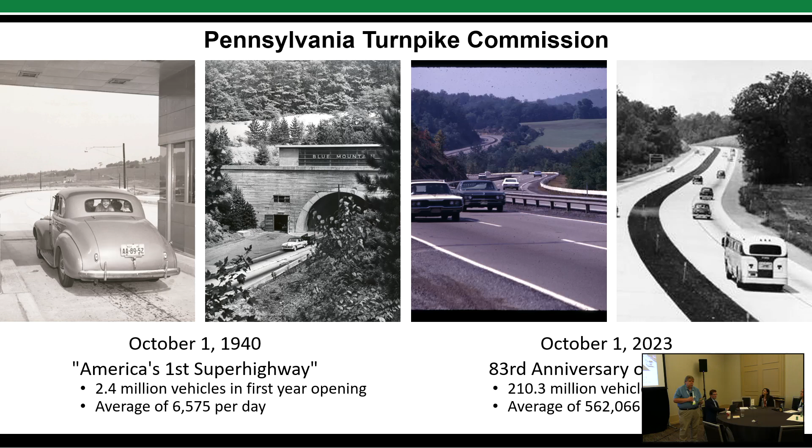Okay, the Turnpike, actually we just turned 83 years old this past October 1st, and basically, initially in 1940 when we opened up, that first year we had 2.4 million vehicles. Just last year, 210 million vehicles traversed our system. Traffic's composed of basically 86% passenger vehicles, 14% commercial.

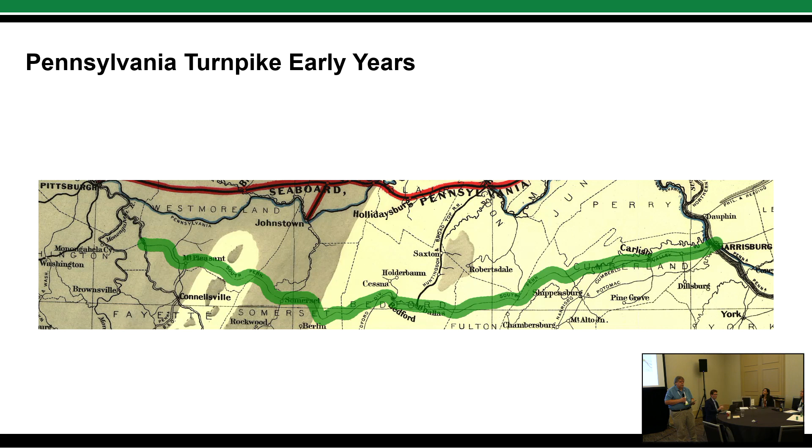Okay, the original 1940 section of the Turnpike really extended only 160 miles from Irwin, PA to Carlisle, PA. Today, the Turnpike consists of 563 miles divided into 7 routes, a main east-west route across from Ohio to Jersey, and then extensions in the west and in the northeast extreme. We have 877 bridges, of which only 16 are deficient, and they are all in design and construction.

There are 28 maintenance sheds, which is about 1 to 5 sheds for each of our 5 tunnels. Speaking of the tunnels, we originally had 8, but in the late 1960s 3 of those were bypassed and then basically sold off.

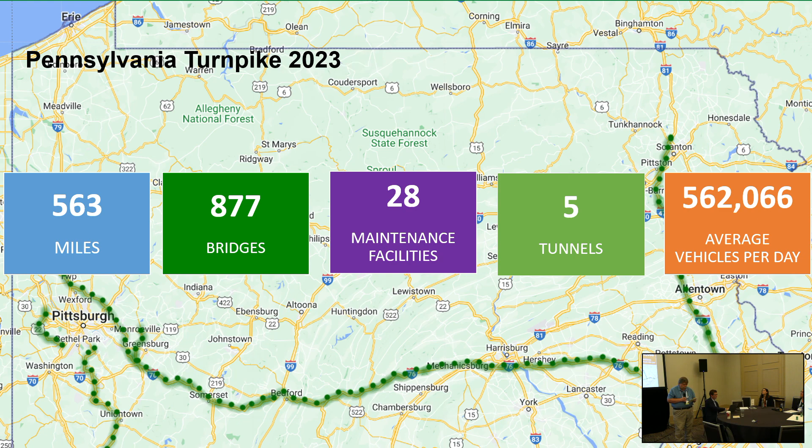The types of projects we're engaged in include total reconstruction of the original section of the Turnpike as constructed in the 1940s and 1950s, from the ground up, much of it widened from 4 lanes to 6 lanes. 150 miles have been reconstructed so far, with another 60 to be completed in the next decade, at a cost of approximately $3.5 billion.

Expansion projects include our extensions in western PA to provide interstate travel through south of Pittsburgh and then connecting with the Beltway around Pittsburgh.

We have open road tolling since we no longer have toll collectors. We are decommissioning our toll plazas and going to mainline gantries, and tolls are being collected via E-ZPass and Toll By Plate.

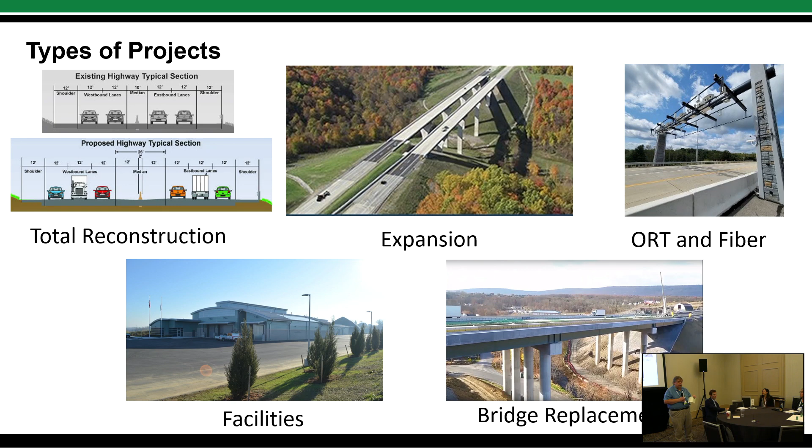We have a fiber optic project where we're installing fiber along our entire system. We've completed from Harrisburg, the center of the state, to the Delaware River by Philly, and we're going on the northeast extension to Scranton. The second phase will be from Harrisburg out to the west toward Ohio on the western extension. The goal is to facilitate transfer of data from our toll collecting gantries, and also data back and forth from our maintenance sheds and service plazas. Plus, we're commercializing part of that to generate revenue for the commission.

We have facilities reconstruction. Many of our maintenance sheds were built in the 1940s and need to be brought up to modern standards for safety and environmental purposes. We also have bridge replacements, replacing older structures with smaller bridges via accelerated construction, which has worked out very well.

Why digital delivery? The project life cycle, or more accurately the asset life cycle, is what's important to us. We have capital planning based on available dollars, and we assign those dollars based on need. Then we go into project planning, design, construction, collecting as-built data until the project closes out, feeding that information into, at this point, a theoretical digital twin, and then providing that information for operations and maintenance, for asset management, and feeding back into capital planning.

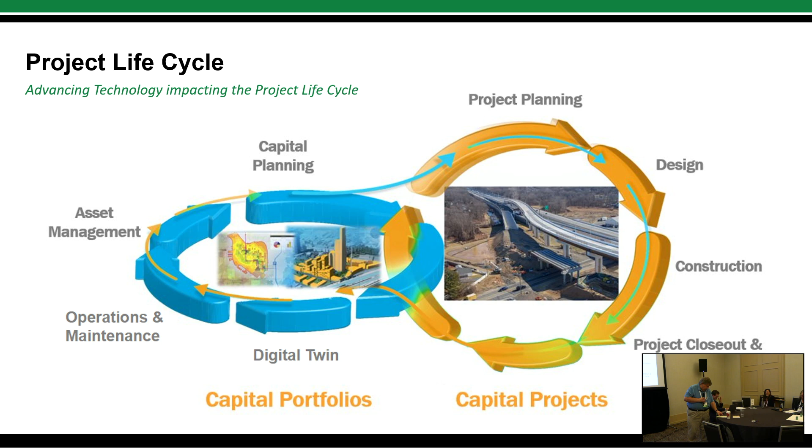From everything I've seen the last few days, this is a more daunting task than originally anticipated, but I'm looking forward to it, at least for the next year or so before I retire, to help lay a lot of this foundation, and then Mark will work for the next 20 years.

Using 3D intelligent models as a primary source document will facilitate reductions in project errors, convey clear design intent, provide greater accuracy, improve collaboration, provide more in-depth asset management, and other benefits we see.

To the PTC, digital delivery means rethinking not just our design and construction processes.

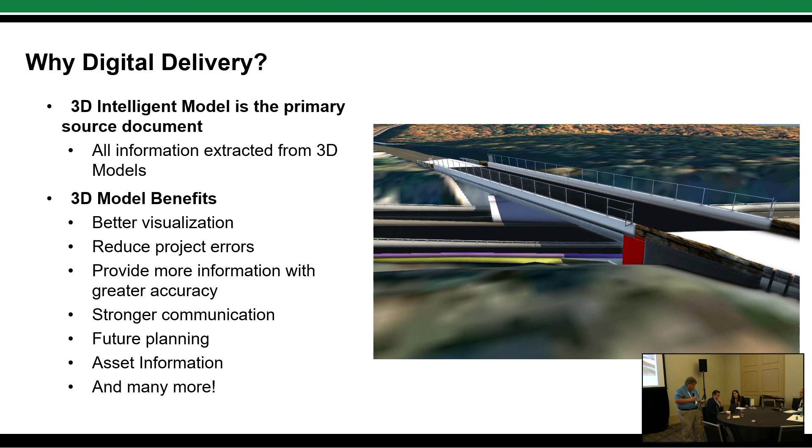To the Commission, digital delivery means rethinking our process from design through construction, but also how we can improve our workflows to streamline our data so that our maintenance and operations groups can consume that data and execute their jobs more efficiently, affecting the whole enterprise.

Our digital delivery program consists initially of our engineering technology plan, a strategic program. We met with 13 out of 14 partners at the time, and approximately 80 people over about 20 meetings, to get feedback from them, find out what their pain points were, and let them know what we were looking to accomplish and what they needed from us to help facilitate their job. That ended up producing what we call an engineering technology plan.

But it's not a static document. We're actually getting ready to revise it again, especially based on what a lot of people learned here this week, and take it back to our leadership to explain what we learned here, then revise it and make adjustments in how we move forward.

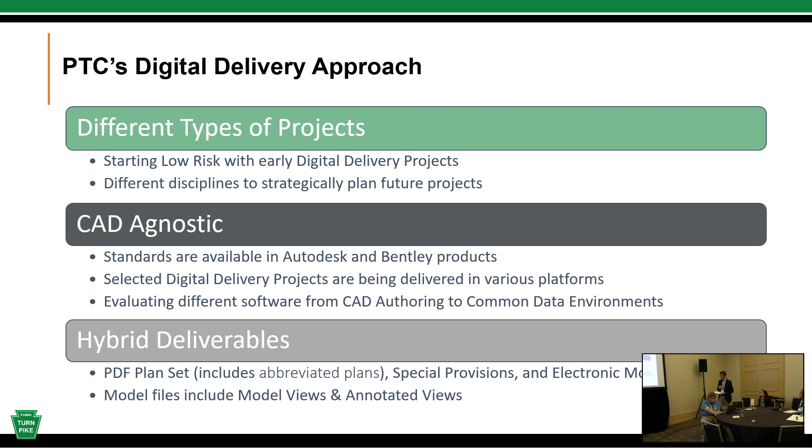CAD agnostic, some of the benefits: it gives designers a chance to play with their strengths, and that's one reason we wanted to go that way. We definitely want designers to use the products they're familiar with and let them use whatever they want. It prioritizes data over software, which is another reason to be agnostic, and it doesn't limit by one platform, so it's nice to have options.

Challenges: I did mention before, managing the multiple standards can be a bit of a challenge, and it takes a little more effort in order to do that.

Various tools, common data environments, things like that - we know that Bentley products don't necessarily work well with Autodesk products if you're going to ACC and vice versa. It's not always easy to do that. I think we're hoping in the future that IFC will solve some of those issues. Software advancements are not uniform, so one product may be a little bit better than the other in some categories, and in other ones, the other one may come up and be ahead.

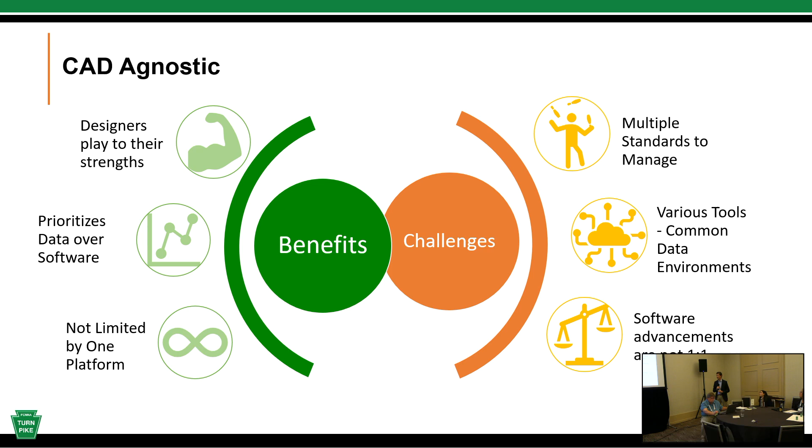News releases - for our digital delivery projects, we have started news releases for those. So 2 to 3 months before the project will be advertised, we actually put a news release out saying this is the type of project it's going to be, it will have this type of deliverable, which is the hybrid. We'll kind of go through the sheets that would be included in the hybrid portion of it, and then we'll let them know what type of software would be delivered in.

That's something we'll be doing for the first couple. The advertisements then include all the contract documents, so you'll have plans, specifications, and addendums go up there if there are addendums, and then RFIs. So contractors can send RFIs in and we can answer them through this system. And then obviously construction bids, they come from the same system.

How are the electronic files included in the bid package? When we started this process with our first project, it took a lot of coordination with our legal department. So we've added some special provisions and modified a few special provisions with specific specs. It outlines the type of software version, model files that were created for the project. And then we've done some others that allow us to seal electronic plans as if they were hard copy plans, so electronic files are basically the same as plans in the set.

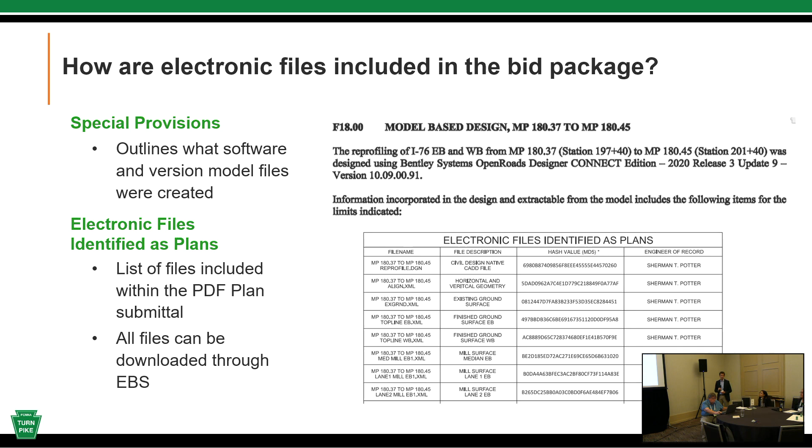So I mentioned the date and timestamp. We advertised that first project, and the team quickly realized that a date and timestamp is not a good idea when you're dealing with electronic files. The way it works, our designer sends the files to us one form or another - they upload to our SharePoint or whatever they do. And then our construction management department uploads them to the EBS. So each time those change file directories, that date and timestamp changes.

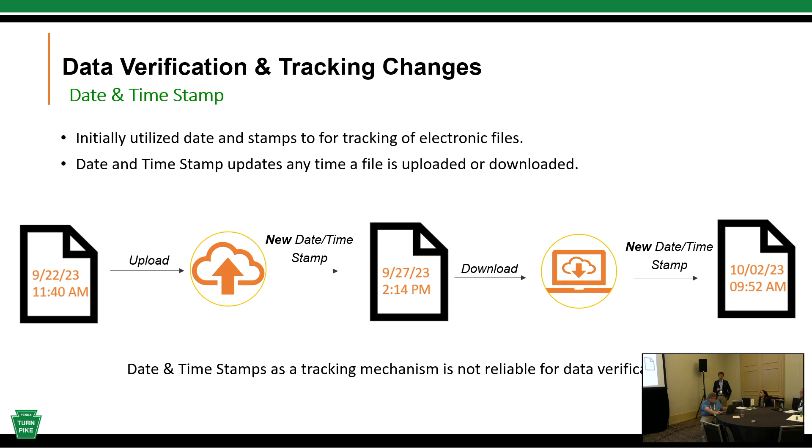Realizing that was an issue very early, we decided to go to a different method, explained here on this next sheet. So we started using hashes for the next project that's going on - the project we started on is advertised. It's basically a signature that identifies some amount of data, usually a file or message. And this is not new technology at all - these algorithms were first developed in 1958, so it's definitely technology that's been around for a long time.

This hash value that you can see in these electronic files is a 32-character alphanumeric value that basically changes anytime something changes in that file. So if someone goes in and changes a line by a thousandth of a foot, that hash will change in that file if it's saved. So it basically gives the contractor, in our opinion, confidence that what the designer delivered is also what they're looking at.

I actually looked up some stats on this, and I think it's like 1.47 times 10 to the negative 29th chance that this hash can be repeated in a file. So it's like getting struck by lightning several times, I'm sure.

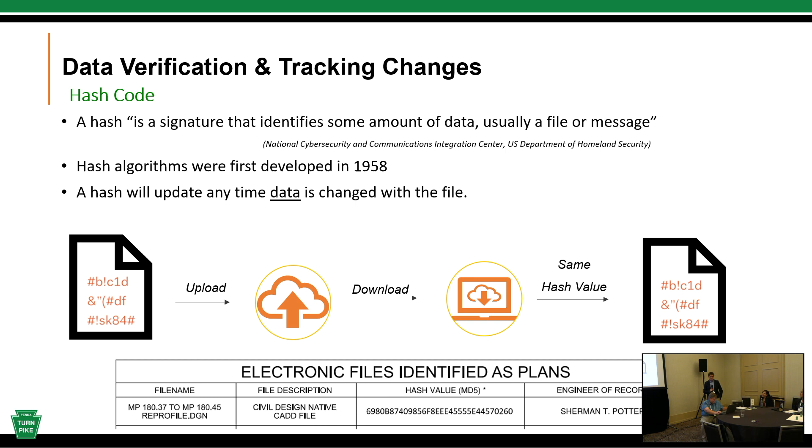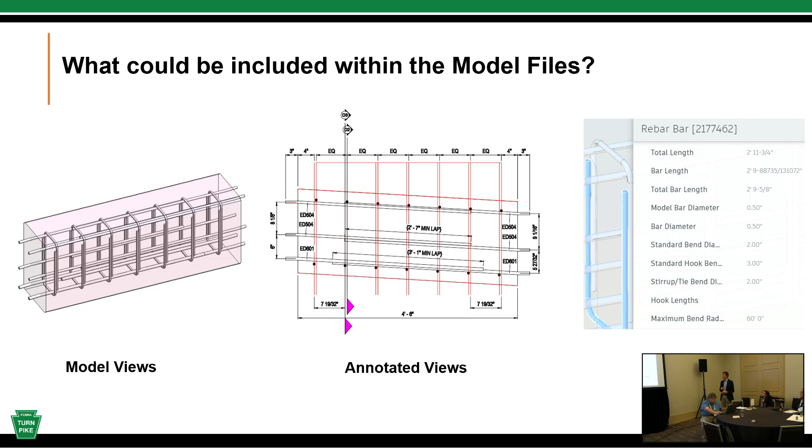So what could we be including in these model files? What you're seeing here is part of the project we advertised a few weeks ago, maybe a month ago. It's a diaphragm from a bridge. On the left is a transparent view showing rebar, and in the center is what we're using as annotated views. Next is the property data. These model files contain all of this data: the model files, annotated views the designer felt were important, and you can click on an item and see the property data as well.

This is the video I mentioned. This is actually a pier for the project, so this is the pier model. You can see if you click on the rebar, you get some data on it, basically telling you what it is, the size of it, the length, things like that.

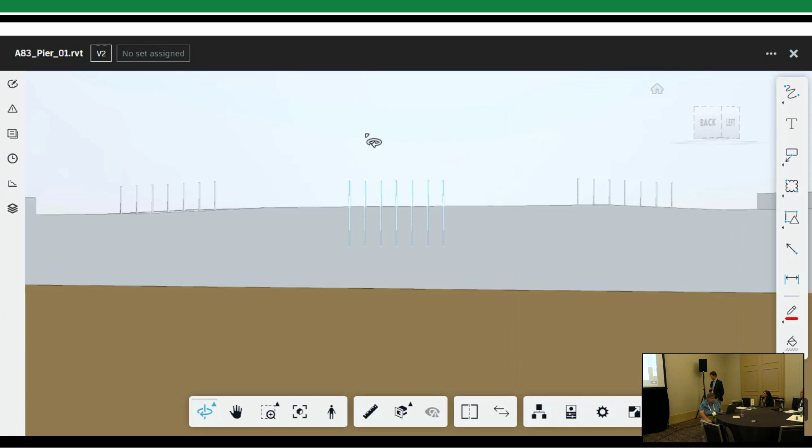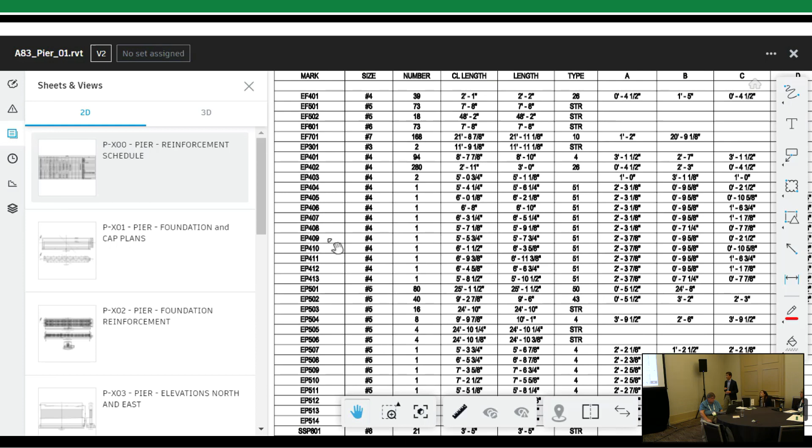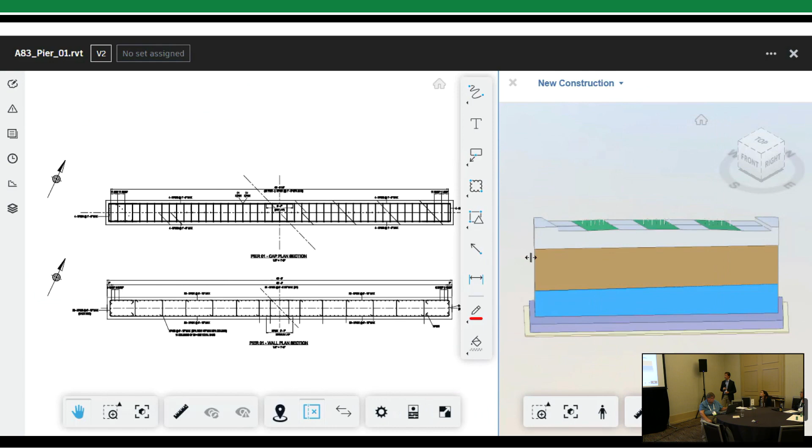Once you open them, you can see the 2D views. Those are the annotated views I mentioned earlier, views that the designer felt were important to the project. I'll point out that all of this information comes directly from the model. This isn't something the designer uses and annotates afterward, it's actually data that's in the model, extracted directly. So we're not depending on a designer to type something in, this is all information we know is at least in the model itself.

A little bit more on the right there, you can see you can turn layers off. It's similar to being in my CAD software, you can't really do anything in it, but you can pretty much see everything that's in the drawing. You have layer control and things like that as well.

Okay, next, additional files. We're looking at multiple options. We really don't know exactly the way the industry is going to go right now, we don't know exactly what contractors need. So the first project we advertised and did had XML files in it, and Stephanie's going to go into more detail with the projects themselves. We did provide one IFC file as a pre-bid with our bridge project. And then on the left there's a federated model, that's something we may or may not include with the package itself.

The last project we advertised was components, basically. So it's all the components, and we provide that list with the hash to each item to confirm that nothing changes. So we're still investigating the file types, bottom line.

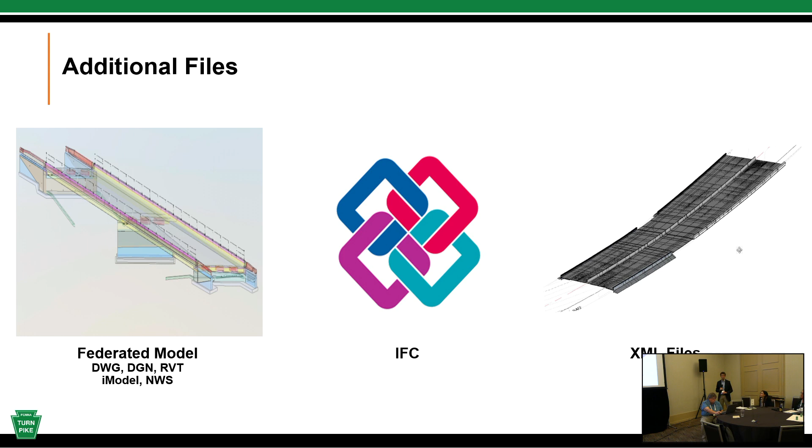Next, I believe I'm turning it over to Stephanie to go through our digital delivery projects in detail.

So our first phase of digital delivery projects, we start with four different types of projects. As Mark was stating earlier, we want to start with low risk, but also look at the different disciplines. As you can tell, the Turnpike Commission does a wide variety of different types of projects. So starting off, we started with a resurfacing project, and right now we're going in order of the advertisement or bid date for each project. That resurfacing project was about a 4-mile span, and it had a very small, about a 400-foot section of reprofiling that was needed.

So that reprofiled section is what was bid as our electronic file, as the legal document, model as the legal document for that project. All of these projects are some type of hybrid deliverable, so there is an abbreviated plan set that typically includes our PDF contract documents, general notes, things like that, as well as a list of those electronic files. Our next project is the A83 Bridge Replacement Project, and this project encountered a lot of firsts.

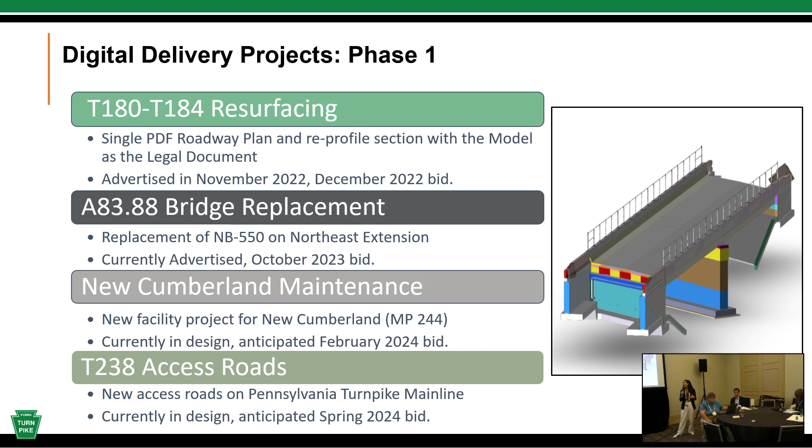We were advertising the full structure as a legal document, and we'll get more into details for that. This project is also a little unique too, it's a Turnpike bridge project carrying a state road, which means the Pennsylvania Turnpike Commission is responsible for design and construction of that bridge project. However, we do need PennDOT approval because the bridge will actually be turned back over to PennDOT once it's constructed. We also have a maintenance facility project as well as an access roads project, which I'll get more into detail on the next coming slides.

So the first project, T180 and 184, there were two things being tested here. The hybrid deliverable actually included a single project PDF, full-length project PDF of the roadway plan, and then we had that reprofile section as the legal document.

With the single project PDF, it also included legends and colors to easily depict the roadway aspects. It will identify where median and shoulder mill and pave was compared to the lanes themselves, as well as an additional couple of items, reprofiling section, rock lining, and so forth.

The feedback we got from the contractor for this specific item was overall enthusiastic. They said this is such a game changer to actually have colors involved and be a little bit more intuitive to see what is happening where very quickly with the project.

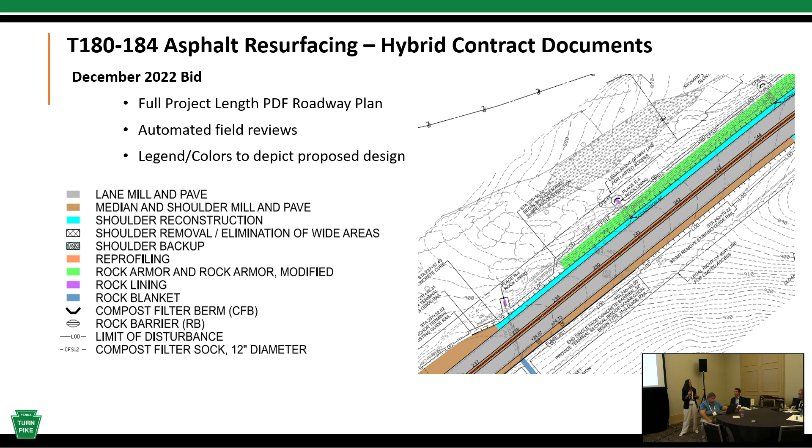And then we get to our electronic files. There were actually 11 electronic files included with this. We started with just one DGN file. This project was completed in Open Roads Designer.

That was for the reprofiling section, which we'll see a little bit more in depth. We also had 10 Land XML files, so this was for the surfaces of the various pavement layers for the right shoulder, different lanes, looking at subbase, and so forth, with the idea and hope that the contractor would be using those XMLs as a part of their AMG or for whatever purpose they may need.

This also includes some as-built special provisions, specifically for the median barrier guide rail, a couple of special grading areas. This is looking more to the future, getting that as-built data back. The survey methods were open. We just want to see what we would receive from the contractor, and that way we can take that data and see where we want to go next with this model overall.

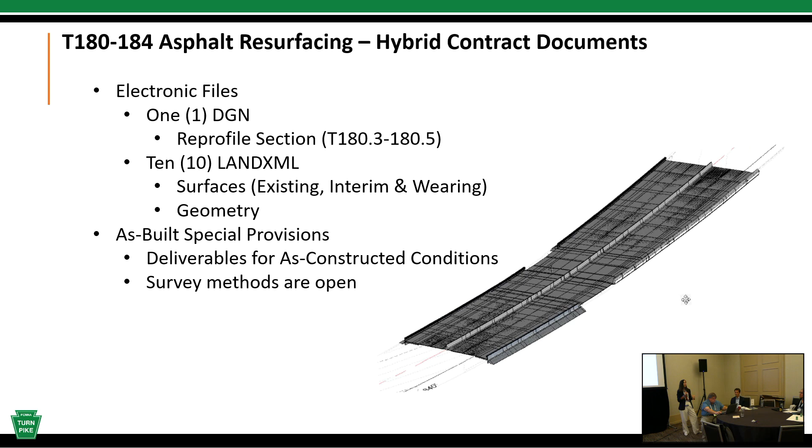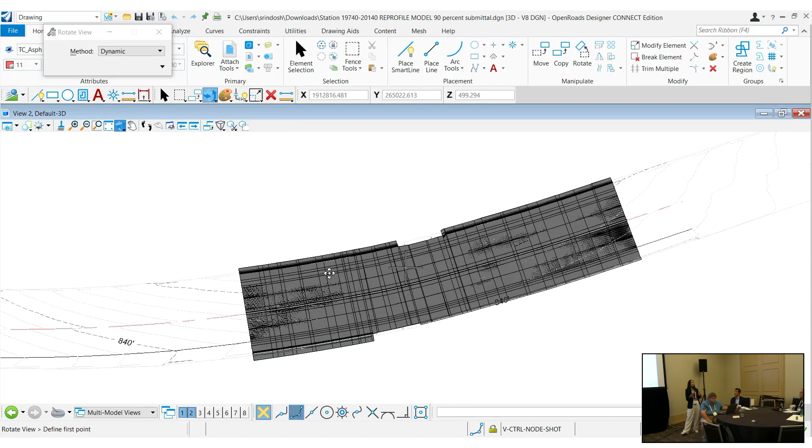So we can go ahead and see this video. This is within the Open Roads Designer of that reprofile section. We just need to hit the space bar to play it. Nothing fancy or to be blown away by - I'll save that for the coming videos. But I just want to show that it was a simple project, low risk, and this is really truly just getting our feet wet with digital delivery.

A lot of the aspects for the front end actually involve talking to legal and construction on how these projects can actually be included as a legal document. So we wanted to safeguard and do a small section of the roadway itself - only 400 feet, a resurfacing project.

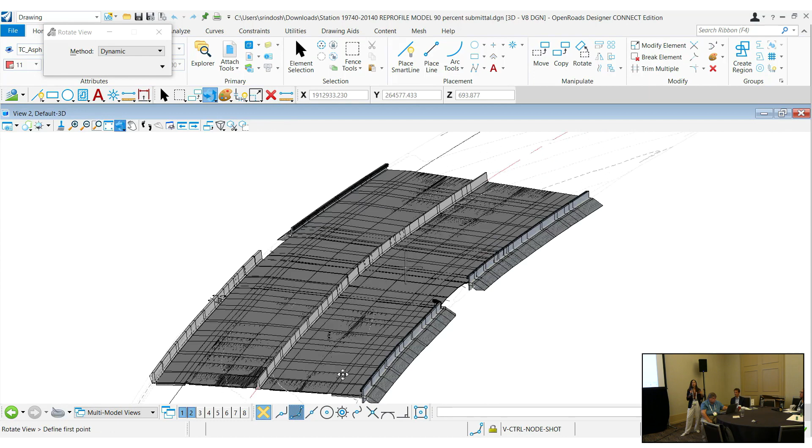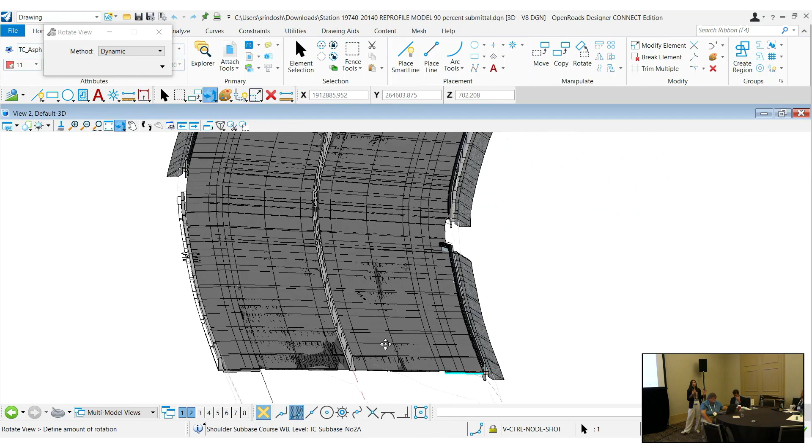You can click on the different pavement layers. It will pull up the property information, which you can see in the common data environments for the cubic feet of volumes, as well as the type of material that was used. So really low-risk project, and construction actually just completed the westbound side of this for resurfacing through that profile. There hasn't been any alarms yet, so that's a good sign, but we still have to do the eastbound side, which is happening over the next 2 months.

And then this next project is our A83, our bridge replacement project along the northeast extension. So this project had a lot of firsts. It was our first project using hash codes as our data verification.

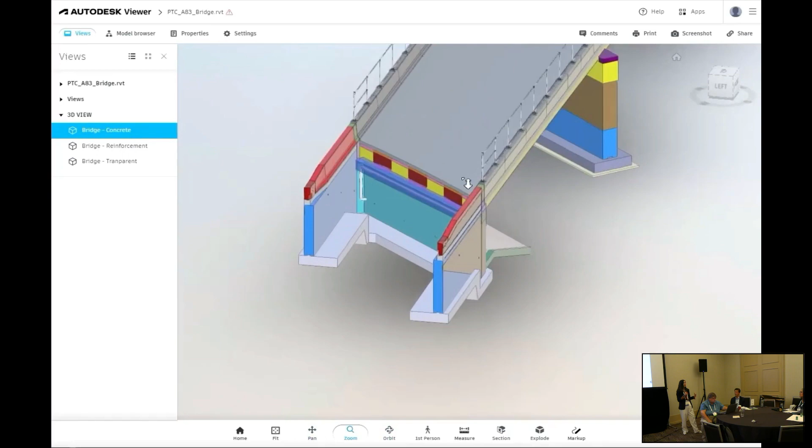The real big reason for that data verification is we actually don't want to lock down the model files. We want the contractor or whoever's receiving this to be able to interrogate the data and get that information. So this was a way we could verify that data.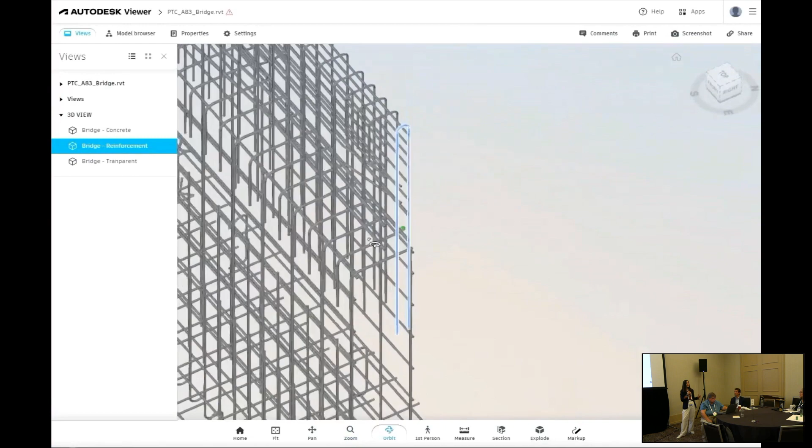The second aspect was actually getting PennDOT's approval for the bridge, so having some type of interagency collaboration. PennDOT was using Bentley Synchro to actually view the model, meanwhile we were using BIM 360 for our common data environment and reviews. We actually sent the Revit model of the structure and then used IFC for the rebar for them to conduct the reviews. This is probably one of the biggest groundbreaking CAD-agnostic approaches, but it is possible, and we're slowly getting there further.

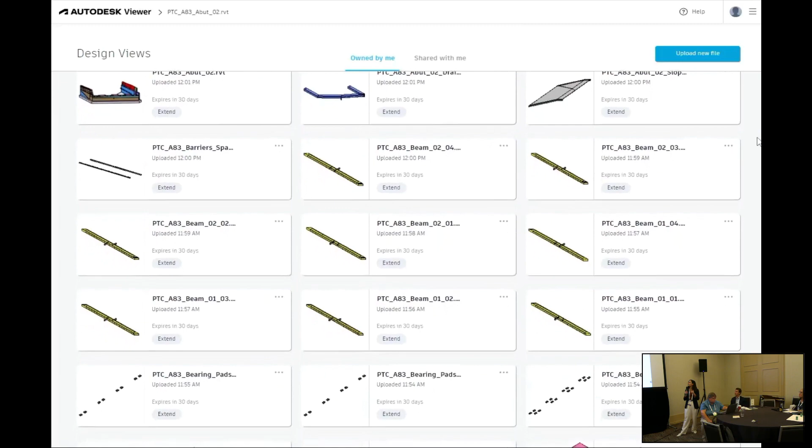As you can see, this was our third big first - actually having a pre-bid meeting. This is looking at all the docs, and you can actually see all the files that were bid as the electronic model, as the legal document. Each individual file is the legal document that is listed out as part of the contract, and then the federated model is for information only, bringing all of that information together.

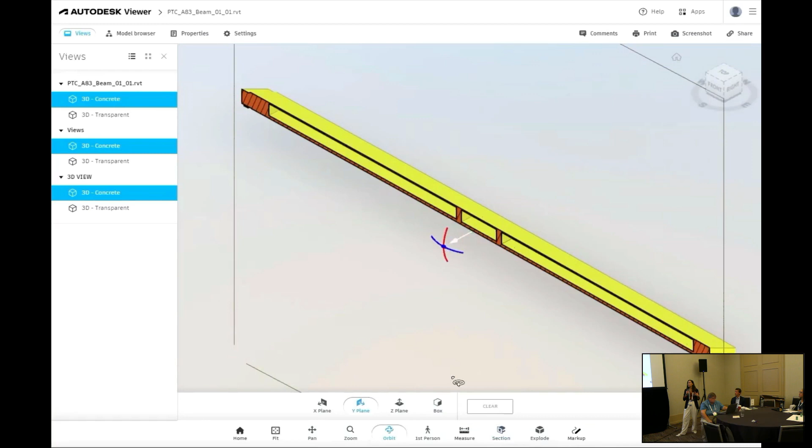As mentioned before, the power of the tools is really going to be when you actually open up the data and note that there's more information included within it. You can see where there's rebar located, interrogate the data, but also look at the different views.

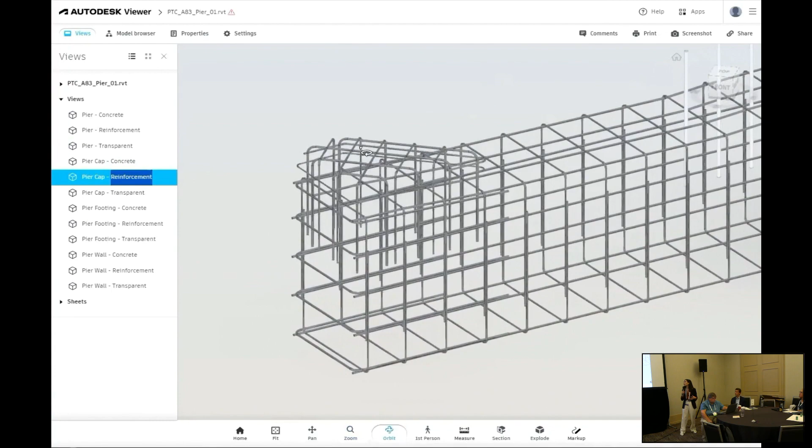Views are a huge aspect of this, and something we want more feedback on from the contractor. As much as I'd love to just hand over the model and walk away, it's unrealistic for a contractor in the field, or even PTC's inspection staff, to open up a model and measure on an iPad or get elevation points they need. So the designer created annotated views, rebar schedules, and other things they might need quick access to that we thought would be most important for construction. We're looking forward to feedback on whether this is too much information, or if more is needed to hit the ground running through construction.

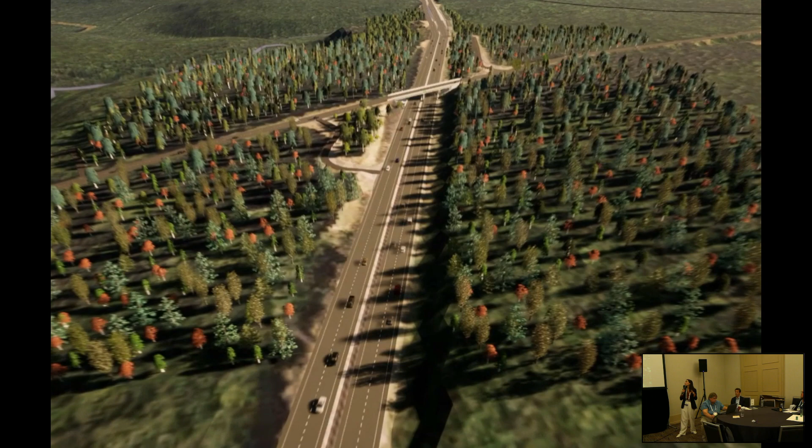So we took this project from Autodesk Revit, brought the final design into InfraWorks, and then used Twinmotion to show what the project looks like on site, completely built and constructed. I think this is a big aspect of what digital delivery can actually improve on as well.

It's also not just for stakeholders within your organization as an owner, but for communication with communities. All of Turnpike Commission's larger projects have their own website for each individual project, where we can showcase what's going to be happening in this area. So for project A83, that bid date is October 20th.

I have very high hopes. I'm very anxious but very excited, and so far things are on the right path. That project will hopefully be back next year to present on how the construction phase is going.

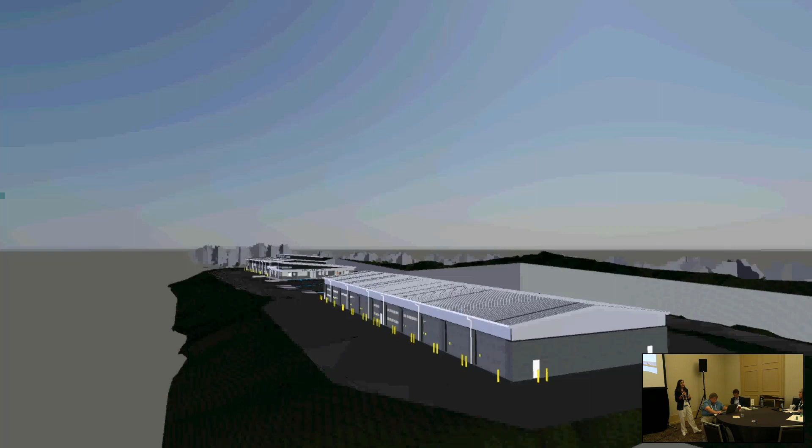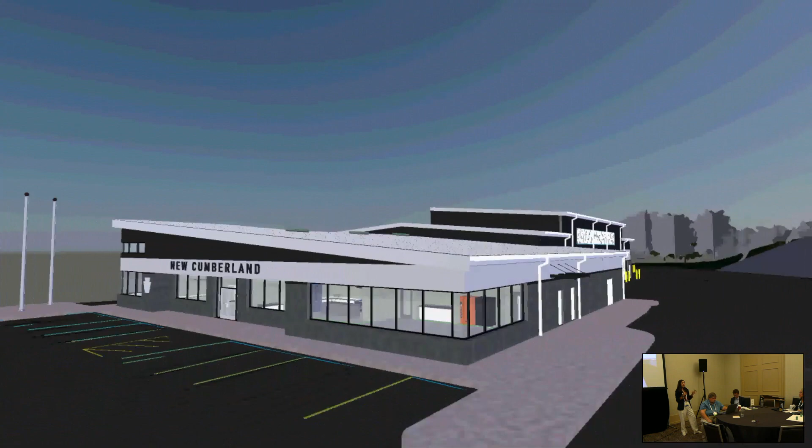Our next project is a facility project, the New Cumberland Maintenance Facility. This is being constructed on the Pennsylvania Turnpike main line using Autodesk Revit as well as Civil 3D. The Civil 3D parking lot surface areas are included. Right now we're looking at Navisworks, bringing all of those components together. Each individual building is in its own Revit file, along with the Civil 3D grading, all brought into one place so we have the full picture of the federated model itself.

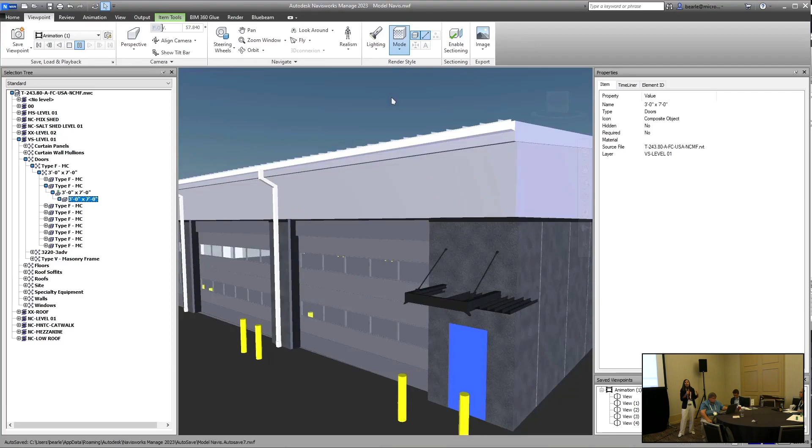On the building side, digital delivery or BIM models in general have been well established as far as national standards go for probably more than a decade. So this wasn't too groundbreaking when it came to the facility aspect of it.

What we're aiming to do to take this a step further is actually use different types of as-built information to capture this data. So right now we're discussing different types of special provisions that could be included so we can potentially do a scan-to-BIM effort or use different types of LiDAR scanning to get the full picture overall.

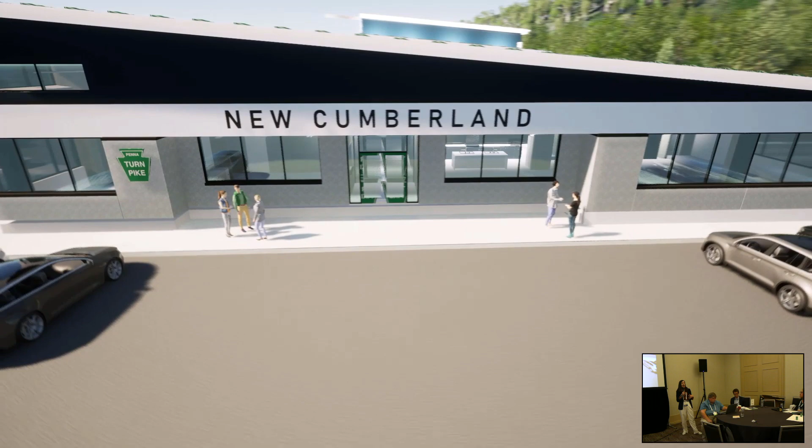We also took this project into InfraWorks, because why not make it pretty and beautiful, the most impressive facility project along a Turnpike Commission mainline highway. This is once again taking the power of that information, seeing how things look geolocated, and taking it a step further for community outreach.

This project is right now just at about 90% completion. So we're looking at sometime next year for the design to be finalized, and then also putting it up for bid.

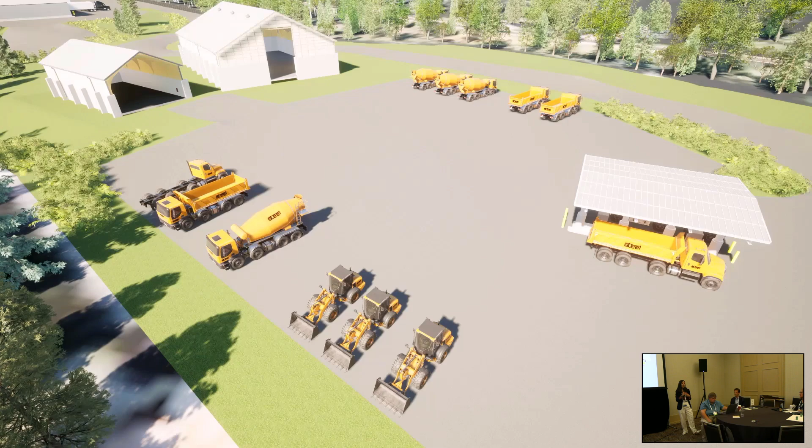Yeah, and we were just having a lot of fun with the different Zoom capabilities, as you can see.

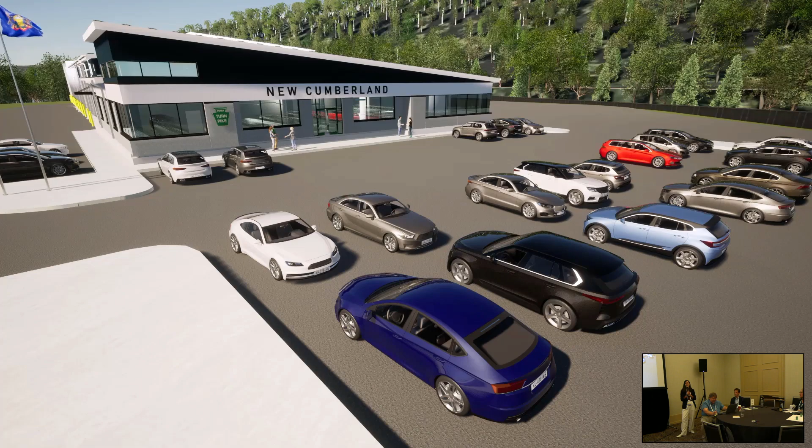Our next project is going back over to Bentley. Now we're looking at Open Roads Designer, for access roads along the main line itself. Access roads pose as a low-risk type of project. We weren't going to start with a total reconstruction project like previously. We want to see the different components of the highway itself.

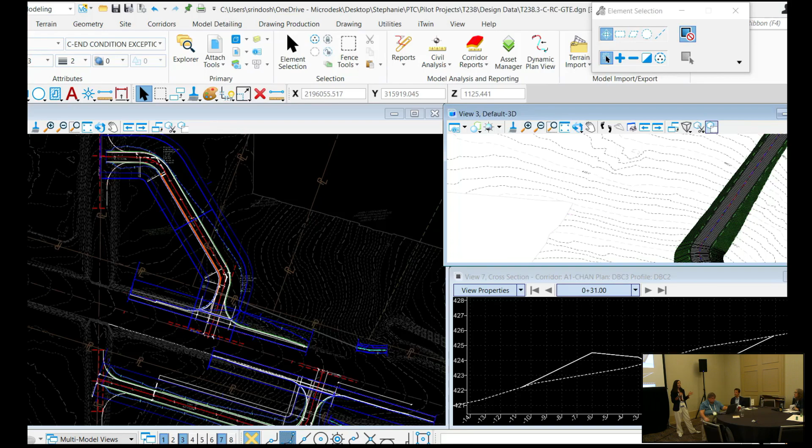So we're going to go a little bit more into the design. This right now is completing around 75% as far as the design goes, so it's looking at a bid date sometime next year overall.

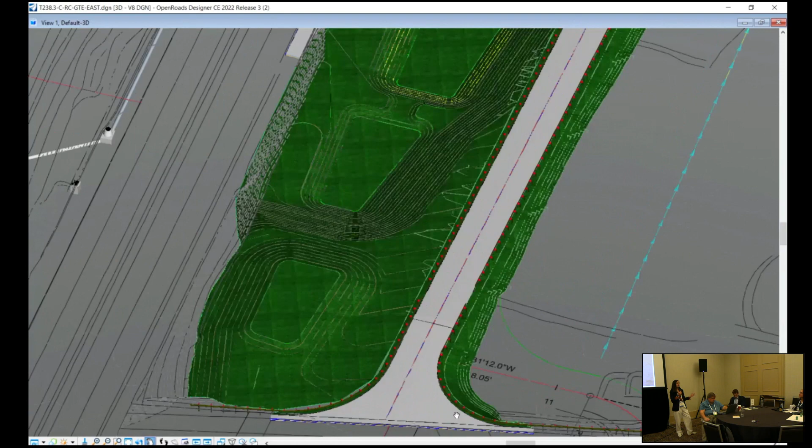But you can see with Open Roads Designer, we have our access roads on the eastbound and westbound side of the highway, and then there's also some drainage structures being included here. So this project's also delving into how we use stormwater management devices, with a treatment train system as well as a rain garden, and bringing that into the BIM deliverable.

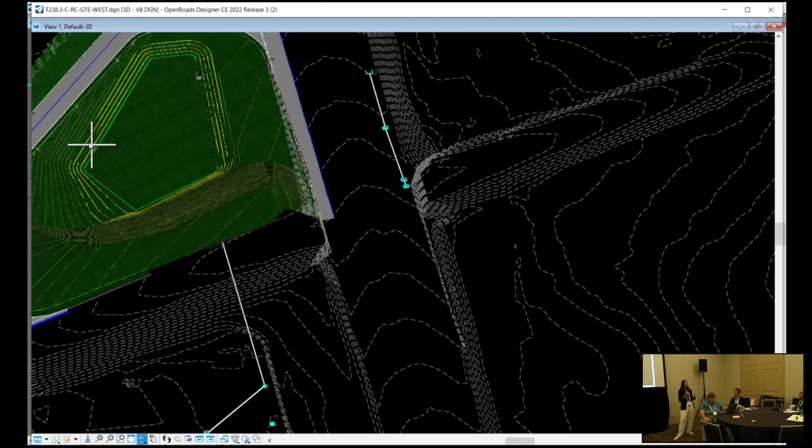Is it just grading? What information do we want to include as far as the drainage structures go, and so forth. This is something I think is going to be overall powerful with BIM itself within the transportation sector, specifically when it comes to drainage items. There's a lot of data already included, and how that information can be shown in a model file is a lot more simple and intuitive. You can click on the structure and pull up that property data rather than using traditional plan sets and cut sheets.

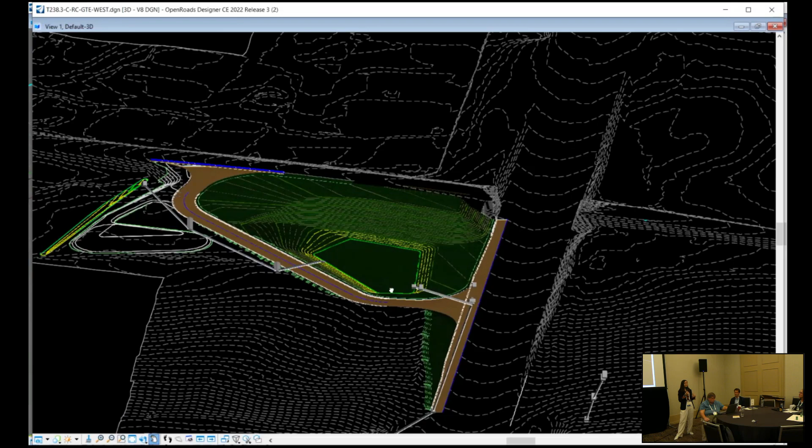So with this project as well, there will also be special provisions involved to collect digital as-built information, especially since we're dealing with stormwater devices and how we want to actually scan or capture that data. So we're having conversations on what that as-built procedure is going to look like as well.

All right, so that was phase one. So what's next? If anyone was here on Monday for the FHWA presentation on how BIM is being included, they actually showed a timeline of how they recommend DOTs adopt BIM overall into their projects. They said you have to crawl before you walk, walk before you run, and then hopefully ultimately fly. Coincidentally, that crawl phase they had on there was a two-year process.

We're about approaching two years now with the start of these initial projects, so we're actually completing our crawl phase. Those phase one projects we're just completing. We're now going towards walking. And also coincidentally, they said at the walking phase you need to try larger projects and bigger items, more LOD, increasing that level of detail or development.

So where we're headed next is larger projects. The Turnpike Commission has huge projects. It's not just standard roadway, it's heavy construction projects. So that is where we're headed next.

We're also looking at more modeled elements. I think one of the lessons learned is that the information within the model is so valuable. I know information is being pushed a lot throughout this conference, but we're finding what information specifically needs to be included for construction and what needs to be included for asset management purposes. So that's looking at increasing the LOD overall, that level of detail within each of those elements.

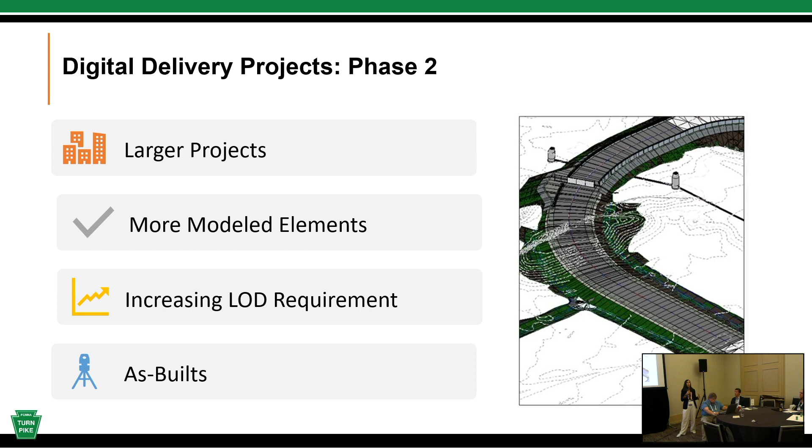So for phase two, these are the currently slated projects. The first being the Delaware River Bridge project. This is a bridge that is being replaced that connects New Jersey to Pennsylvania. It's going to involve the New Jersey Turnpike as well as the Pennsylvania Turnpike Commission, and it is a very large bridge and structure.

That is something that's already having early conversations on. The primary reason why this project got added to the list is we know the design phase is going to be long, and we know construction is also going to be part of that longevity aspect. So we know digital delivery, as things progress, is going to impact this project. We need to start having a conversation today so that the designers know what to expect as we're going forward.

The next is an Allegheny Mountain realignment project. This is actually a bypass of a two-lane tunnel that is over a mile long, and it's also going to include a structure to go around the mountain of Allegheny. This project is also a little unique because it has a proposed land terrestrial bridge included, which will be the first in Pennsylvania. So how do we show a land terrestrial bridge within our model? This is going to be a very fun opportunity to also add some vegetation and different components like that.

We have a brand new interchange being added to the main line, as well as a total reconstruction project, and all of these projects are also slated to use different software, from Autodesk to Bentley, and probably having some type of IFC component, because we know that's where the technology is headed with open standards.

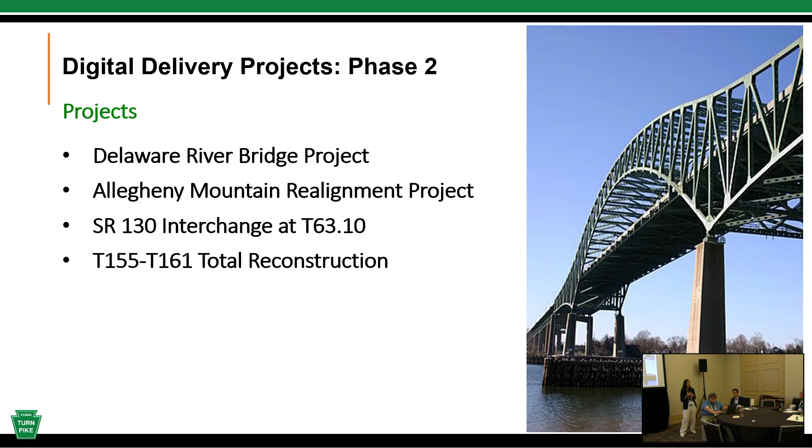Next is asset management integration—developing workflows to extract data from the models to the asset management programs. We've already completed this for the alignments and travelways, specifically for PTC's linear referencing system. That data is currently extracted from our model files and brought into their LRS system overall.

What we're looking at next is some of the larger BIM elements, such as corridors, specifically to their pavement asset management system, their PAMS system, and then pipe networks to their stormwater asset management program, SWAMP. I have to give a lot of credit to whoever comes up with the acronyms—they really think it through.

Overall with asset management, we've already begun the effort since we have our standards developed on how to extract the data out of the corridors as well as the pipe networks and different drainage facilities. But I want to push the envelope a bit more and see how we can start streamlining this information further. A lot of this talk today is about extracting data and bringing it into GIS, but how can we make that more efficient and smoother? That's something we're also going to be looking into.

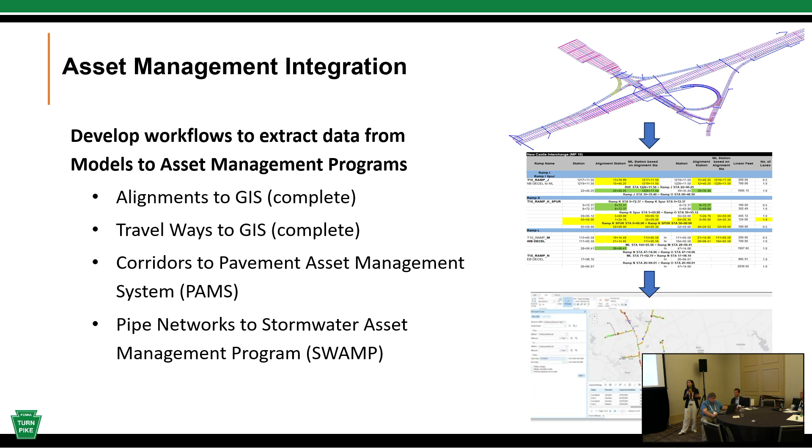Last for the presentation slide is a 2024 GeoBIM pilot effort. We already have a few models fully developed, and we're going to be looking at GeoBIM and using that as a way to bring our BIM design into the Esri environment.

PTC actually has a very robust GIS system with a lot of information already delegated and organized there. So marrying these two together means there's more potential for getting the information to the right people, but also so you can start making the right decisions and planning effectively, coming to that full project life cycle that Butch was talking about at the beginning of the presentation.

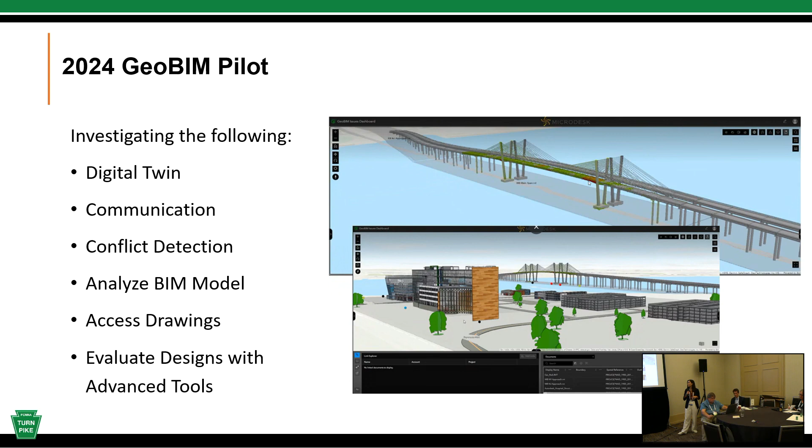So with that, that is all we have for today.

Progress of the program overall—our hope is next year to be presenting on the construction of some of these projects and some of the feedback that we've been getting, along with design overall, I think, of the phase 2 projects. Any questions?

I'd love to have a little bit of an expansion on the hash and how we actually interact with that. How is that generated? How does a designer confirm what they're sending? As a contractor, do I match what I'm supposed to?

This is my favorite conversation because we did a lot of testing on this and delved in deep. Probably my favorite aspect of this was by the end of the whole hash code investigation, our contracts admin from the construction side was describing what hash codes are to the rest of their organization.

The way a hash works is it can exist in every file—no matter if it's a Word document, DGN, or DWG, there are a number of free tools out there. Microsoft has one you can download onto your computer called Microsoft Hash Tool, or you can use a web browser. There are different types of hashes—I believe SHA-256 is the most encrypted hash that our federal government uses, and that code has so many characters.

We talked to PTC's IT group, and they said they really don't need that type of lockdown on their files, so they were comfortable using the MD5 method. What that means is you can upload a file and generate a hash function—you click next, and that hash function gives you the hash code, which is used as that date and timestamp replacement.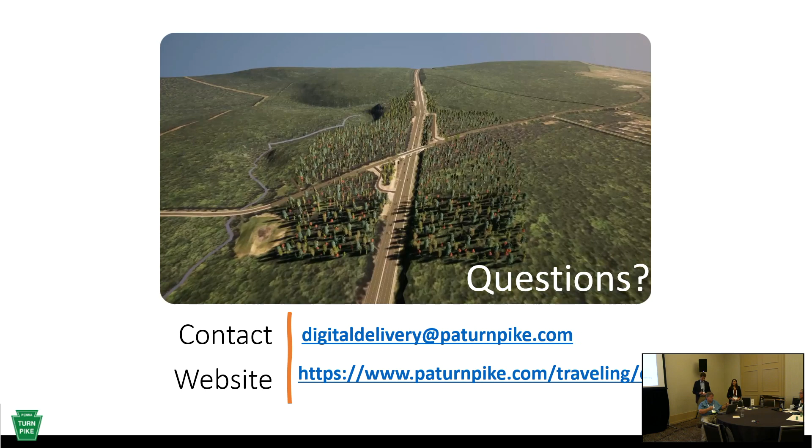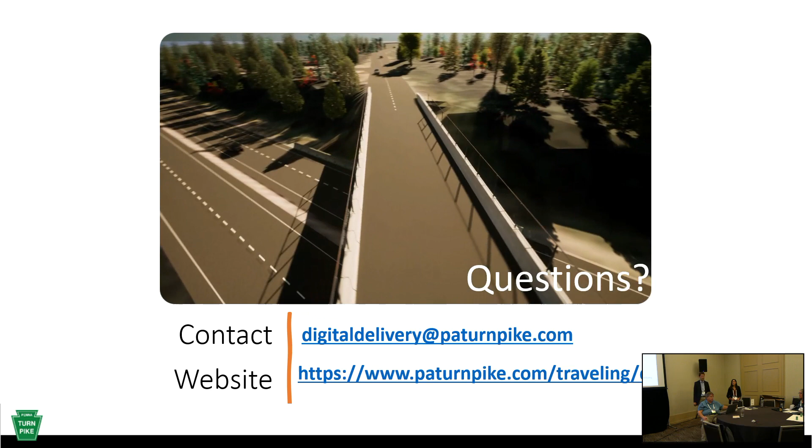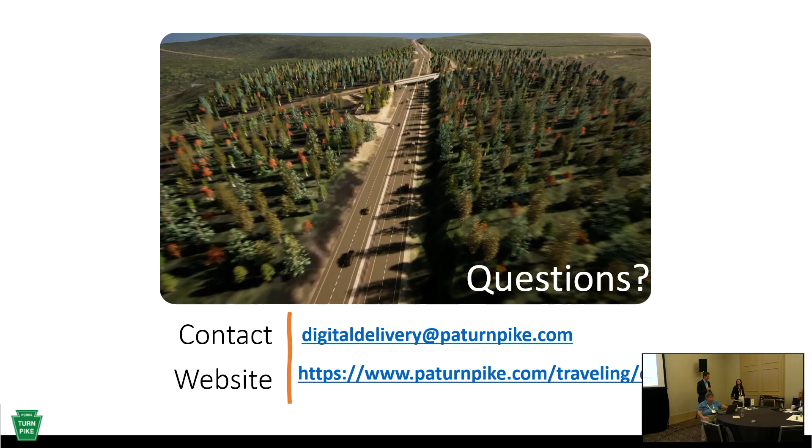Being software agnostic, how often are you doing release updates for your specifications? We're looking at quarterly, but it can depend on the advancements. We're kind of quarterly now, last time was quarterly, but we're looking at advancements in the software.

It's quarterly right now just because we've learned so much from these phase 1 projects through design. As you can see, some of them are finally wrapping up design, and we want to take lessons learned and actually update our standards as much as possible. So it's been every 3 months releasing, but it's probably slowly getting more spaced out, looking at 6 months and then probably a yearly release.

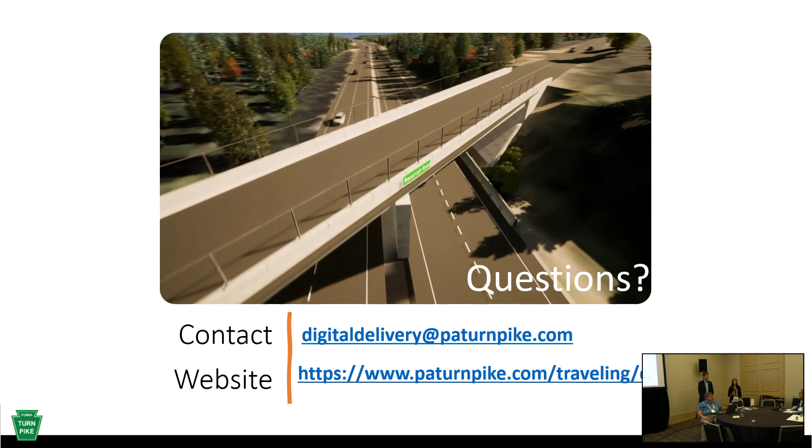And then jumping version to version, Autodesk releases a new version every year. There's no way logistically we can stay on top of that. Plus we have to look at the cost benefit. If we jump, is it worth it?

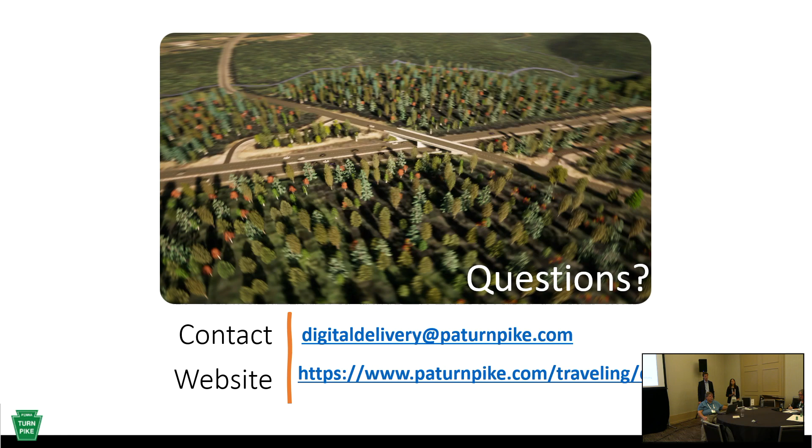For projects there's a project execution plan, a BIM execution plan, so they state which version of the standards they're using at the beginning of the project. We actually have language that says they're not allowed to upgrade without consulting us first. So they have to consult PTC, and depending on how far along the project is, we discuss if it's worth upgrading or not. There's a track record with these different projects. It'd be unrealistic to have a designer update every 3 months for all of these different projects.